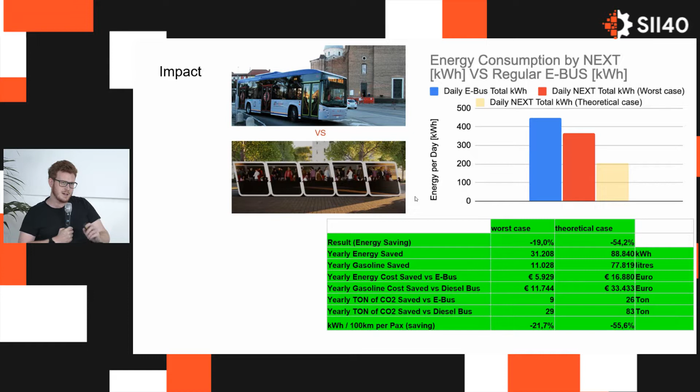So in terms of CO2 emitted directly and indirectly, we are saving, compared to a diesel bus, 83 tons of CO2 per year, and 26 tons compared to an electric bus. So this is just by this very, very easy scenario of implementation. It's very powerful, and you're saving a lot of energy and a lot of money.

But let's go a little bit deeper in the future implementation, in the future scenarios that entail the use of modular urban vehicles. So let's start from analyzing the geometry of a typical European city, and in some cases also US cities and Chinese cities.

So maybe you can exclude only Tokyo and another few cities, but most of the cities have a similar geometry. So you have a very dense center and you have very sparse suburban areas. What does it imply in terms of public transportation and transportation in general?

Well, it implies that it's very difficult to create lines of public transportation that are creating a service that is ubiquitous enough for the city, and the suburban part of the city especially. Why? Because the people are not close enough to the bus station, for example, and so they choose to use private transportation. They choose to use their private car.

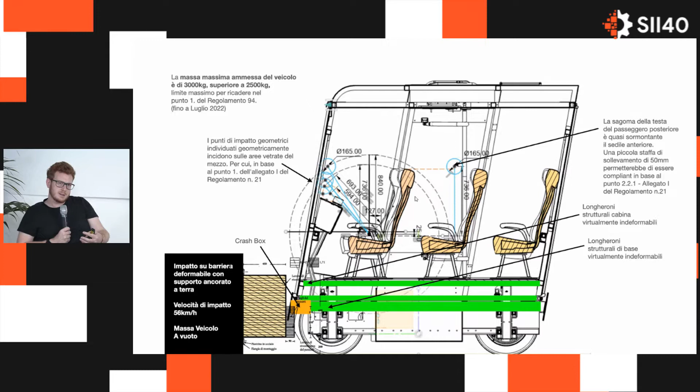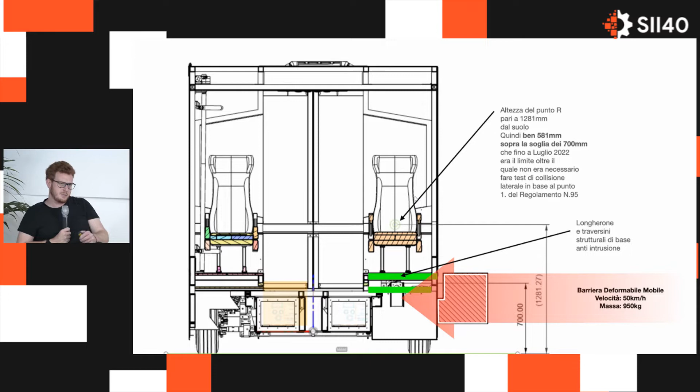The same thing happens in a lateral crash. A lateral crash for homologation is generally done at, as you see with the red arrow, the crash line. So the head, the chest, and part of the legs of the passengers are completely out of the way of the crash. Again, the absorption of the crash energy is done by the basement, and the people are completely safe because the platform is raised above the basement.

So to go again to the mission of our company and of this project, it's not to create driverless vehicles, because driverless vehicles alone and electric vehicles alone are not solving the problem of traffic, and they only partially solve the problem of consumption. The real way to solve this problem is to create a service, and a vehicle that can deliver it, that is ubiquitous and comfortable like a private car or a taxi, but at the same time can fit a lot of people in a very short amount of space, in very few vehicles, so you have an extremely efficient way to move people.

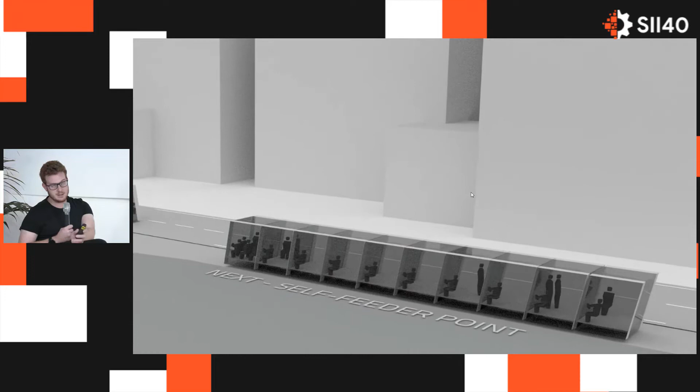In this case, many units are picking up at the same time some people in the suburban areas. In this case, it's a residential area of Dubai. They dock together in a parking space, and this is not happening in motion, of course, as you see here, but it's very, very efficient, particularly in countries like Dubai or the Middle East in general, in which going outside because of temperature is very much an issue. This kind of redistribution of people inside the vehicles is extremely important.

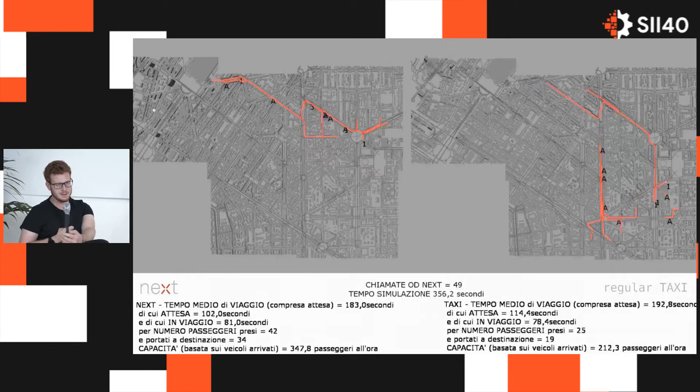And you see on the left the Next vehicles. You see on the right a typical traditional taxi. The same amount of taxis, the same distribution of origin and destination. But the difference is that if you see on the left, the vehicles are following each other, docking together, and consolidating people. After consolidation, the Next vehicles that are empty are immediately free to pick up other passengers that are waiting for the service.

So the total waiting time is dropping, and the travel time is rising just a little bit. You see at the end of the simulation that we will have roughly twice the number of people brought to destination in the same amount of time, with roughly 5% more time in travel. Okay? So you are maximizing the availability of the vehicle, minimizing the waiting time, and just raising a little bit the total time that you spend in the vehicle while going to destination. Okay, so 348 passengers compared to 212 passengers.

Okay, so you minimize the traffic, you minimize emission and pollution, you increase the value of your fleet because you are not underutilizing your fleet with just an average 20% occupancy rate, but you are raising this occupancy rate on average to roughly 75%. And of course, you're creating a service that can be, in a conservative way, something much similar to a bus line, but you are also paving the road to a future service that is much more similar to a taxi on-demand service.

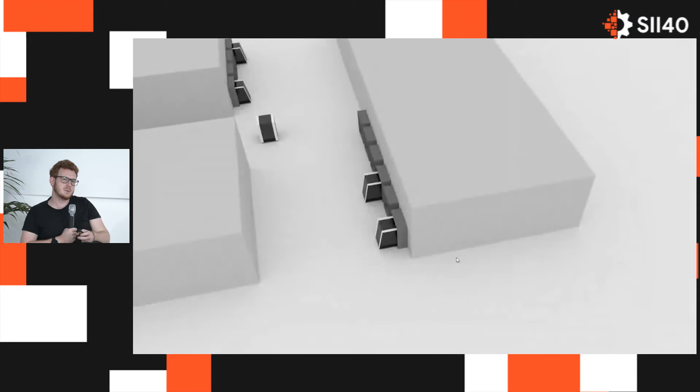It's related to how it happens if you want to use this vehicle as an integrated cargo delivery system. Of course, within private areas, they can work completely driverless. So if you think about a multi-warehouse facility area, you can dock them together completely autonomously. When they are on the public road, you need a human driver, but something that's interesting is that a local distribution shuttle, always the same vehicle, is coming from a local area.

It's docking together with the main truck, so to say, that's not really a truck, but many Next pods connected together. Then of course you can exchange the packages. You can do this redistribution in motion and then deliver the package to the final user without the need for a logistic warehouse to distribute the goods from one truck to many small delivery vans.

This can happen, of course, when you're entering a big city. Generally, on the edge of a big city, you have huge warehouses in which you collect goods from a big truck and distribute them on many smaller delivery vans. And this is the only way you have to distribute goods in the center of the city. This is extremely time consuming and extremely expensive. So what we are doing here is moving the warehouse itself in motion. Distribution can happen in motion, and so you're saving a lot of money.

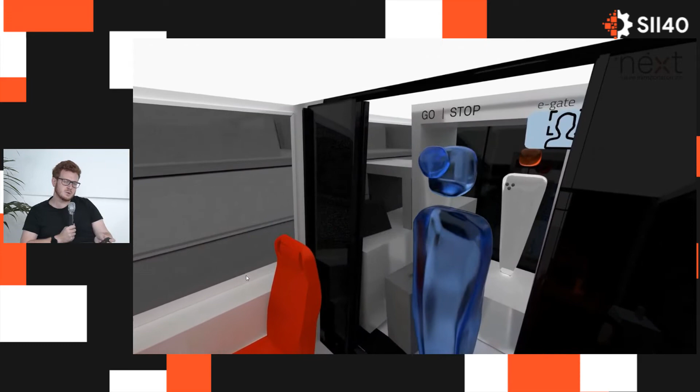These people can use the service. For example, in this case, it's a safety gate and baggage drop-off. You can use this service. You can enter the back of it. So you can enter the pods that are collecting the people that already did the check-in. You can also dock duty-free or targeted service pods together with these pods. And these pods are bringing you directly to the aircraft.

This is quite interesting because most of the services that you generally have in a static place, the airport in this case, are brought to be completely in motion. You grasp the value of it, the premium service in motion and the cut of the waiting time to embark the airplane. Especially for premium service, it's extremely valuable. And you see there is no stop at the airport terminal. The embarking is immediate. So you save from 1 to 2 hours of waiting time.

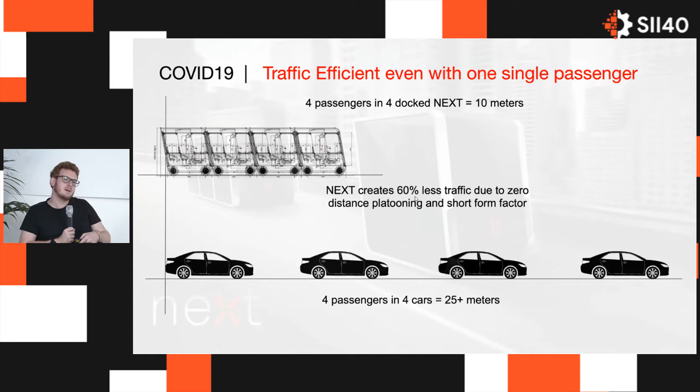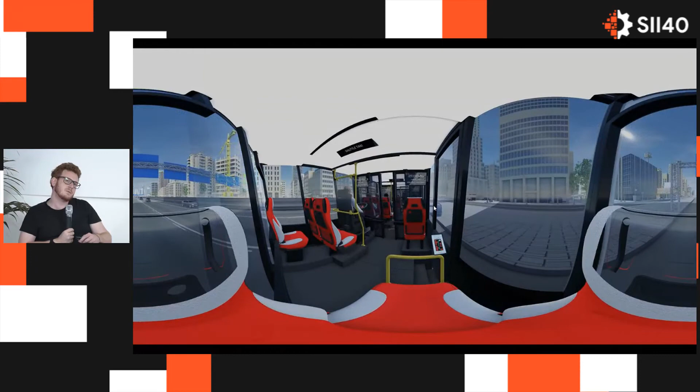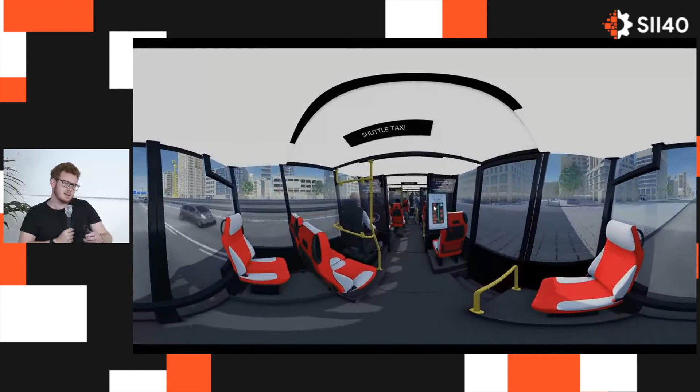But since most of the trip is being done on the main road, on the main road there is an equally high chance that you find another Next unit that is sharing with you the destination. So you will see in a few seconds how this taxi, so to say, is going to dock with another unit. You see here the docking. And in that unit, you find already people that are going to the same destination that you have. So this is like a shuttle taxi. It's going to do some kind of relay race.

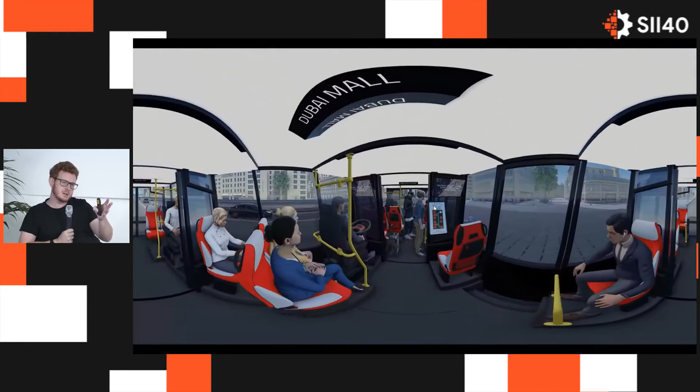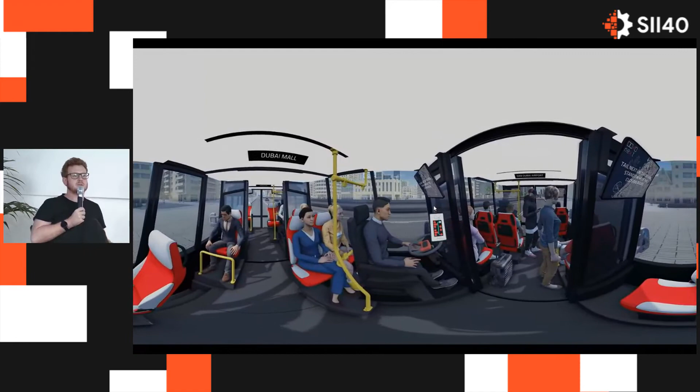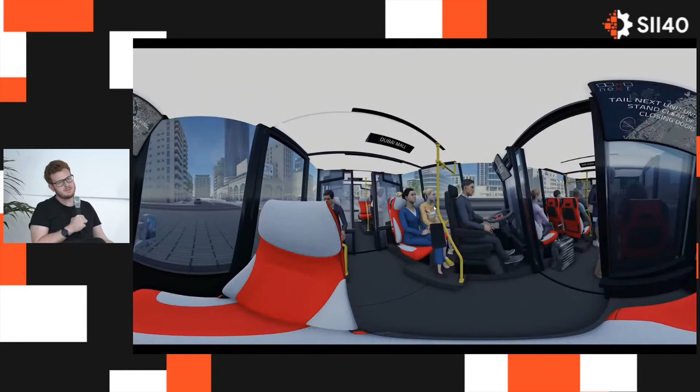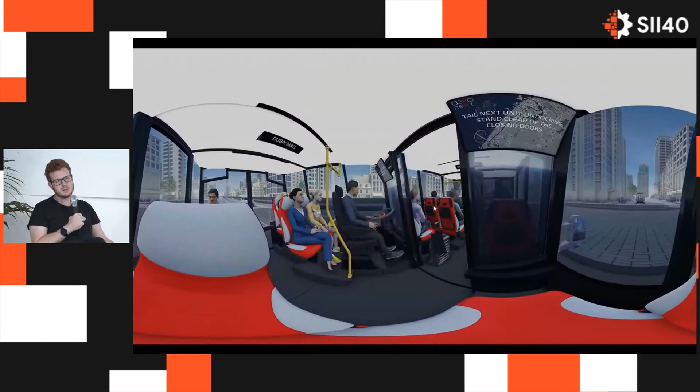It's picking up people, moving these people to the main road, docking to another unit that is already almost full of people going to the same destination, and then going back to pick up other passengers. So here you see that once the passenger is taking a seat, the vehicle on the back doesn't need to be docked anymore, so it detaches and goes to pick up other passengers in the local areas. That's exactly the same as we have seen before with the map simulation software.

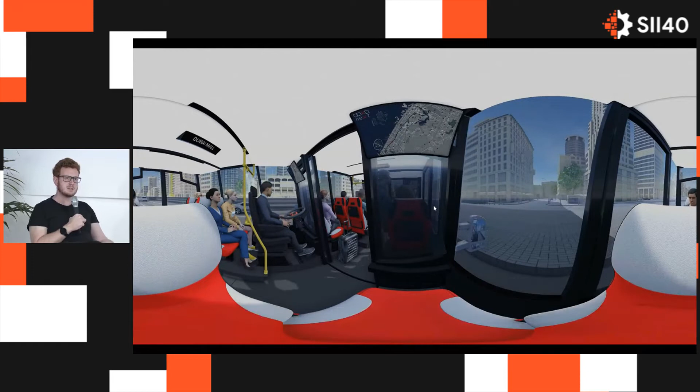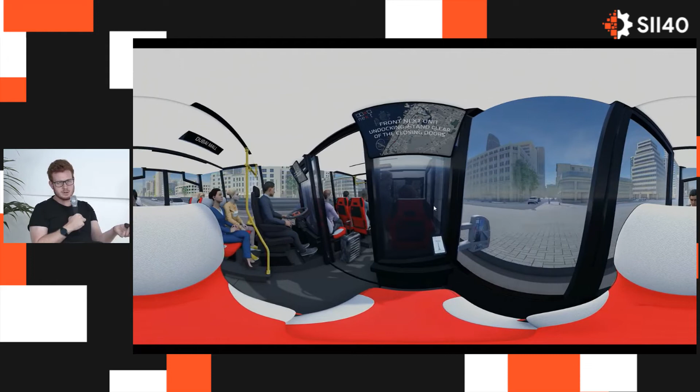This is how it looks like when you are inside. So the transfer between one vehicle to the other, one bus to the other, or one taxi to the other, happens completely in motion without almost any stress for the passenger itself. It's really a matter of stand up, walk 2 meters inside the corridor and take another seat. So it's like in a bus if you change from your seat to the seat in front of you. Of course, when it goes to the destination, it can detach from the rest of the bus and go to the desired destination.

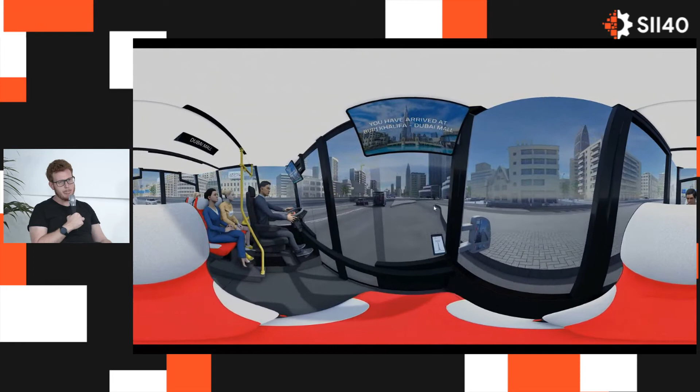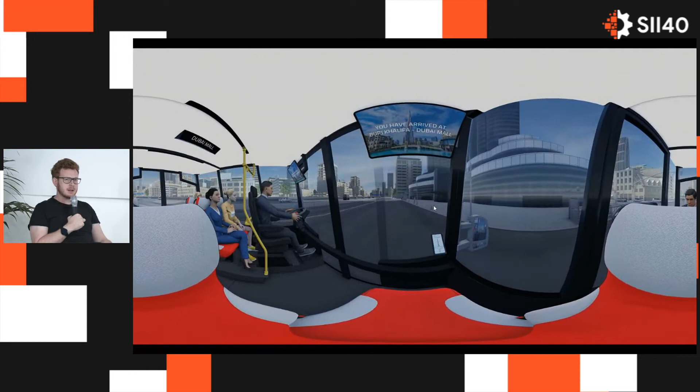It's quite hard to see, but of course all the notification has been given by the phone. And there is a tracking system inside, so if you're not in the correct place, there will be notification on your phone and notification from the speakers inside the vehicles. So it's very hard for people that are not completely dead or sleeping to make a mistake inside.